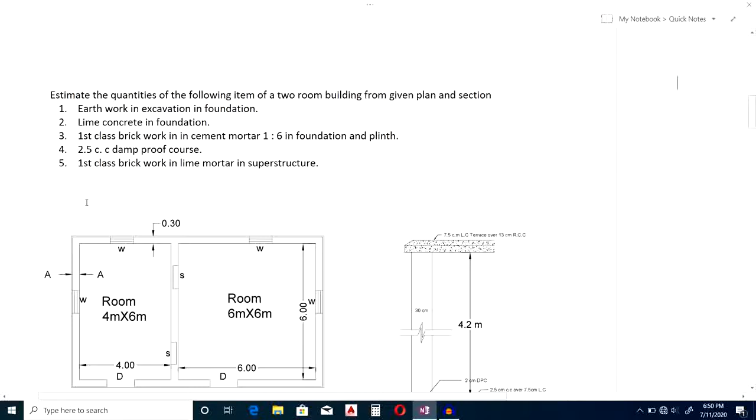Next is asking the first class brickwork in lime mortar in superstructure. First and foremost important thing is whenever you want to do estimation, you require these basic things. You must and should have three important things: one is plan, next one is section, and third one is schedule of openings. If you have these three things, then only proceed to find out the different type of quantities.

Or instead of quantities we can say estimate. You will be able to find out the different estimates. You can find out the estimate for the probable cost of that building.

So you might be thinking, what is long wall? Which one will we take as a long wall? Which one will we take as a short wall? For long wall, you have to take the wall which is lengthwise longer, and we take it out to out. One more thing about this long wall short wall method: people always say out to out, in to in. What does it mean? It means that first you have to find out the length from this center to this center, here to here, center to center.

Lengthwise this wall is long, so that's why we will consider this wall as a long wall. And similarly these walls are shorter in distance, shorter in length. These walls are short. Naturally this wall length will also be the same. So we can conclude that 2 walls are long walls and 3 are short walls, denoting them as long wall, short wall. Next, we have to find out the length for all the long walls and short walls.

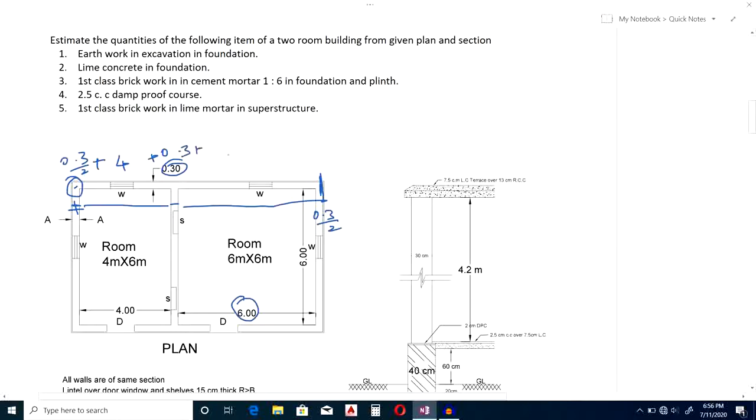We have to take 0.3 by 2 on this side, and after that 0.3 by 2 plus this length, that is 4 meter. Then we have to add 0.3, then we have to add this, that is 6 meter, as mentioned here. After that we have to add half of this length, that is 0.3 by 2. That means we take 0.3 by 2 plus 4 plus 0.3 plus 6 plus 0.3 by 2. If you add all those things and solve this, you will get 10.6.

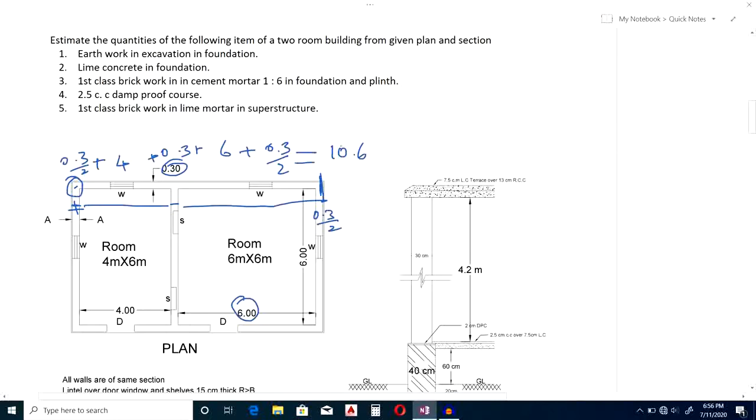Similarly, I will write this all over here. The length of long wall will be equal to 10.6 meters. We'll also see the length of short wall.

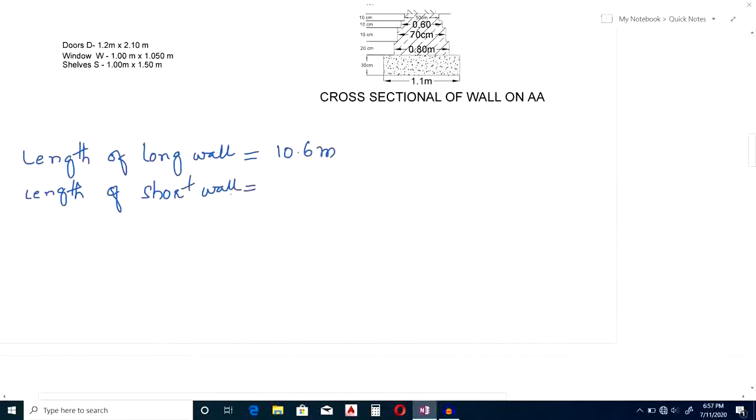Length of short wall. How to calculate the length of short wall? Similarly, how we have calculated the length of long wall, we have to calculate in the same manner. 0.3/2 plus this length is 6 meters from here to here. 6 plus this side 0.3/2.

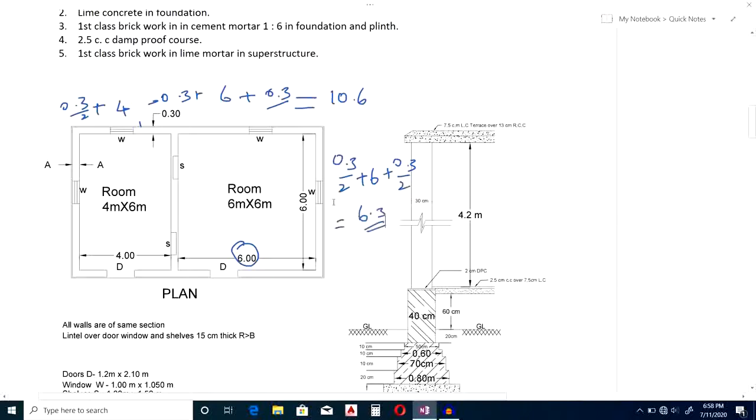0.3/2, how much will we get? 6.3 will get. So I'll write down here 6.3 meters. Now we are having the length of long wall.

Now we are having length of short wall. Our detail, we'll go for detail estimate. Next, what is asking in the question? It is asking that earthwork in excavation in foundation.

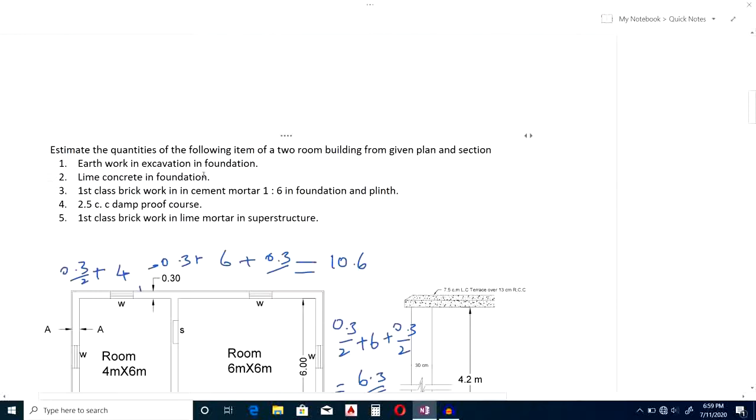Okay, first we have to go for, and remember, for doing detail estimate you have to draw one tabular column in this manner. So it should be: first item number, next particular of work, next number, length, breadth, depth or height, quantity and remark.

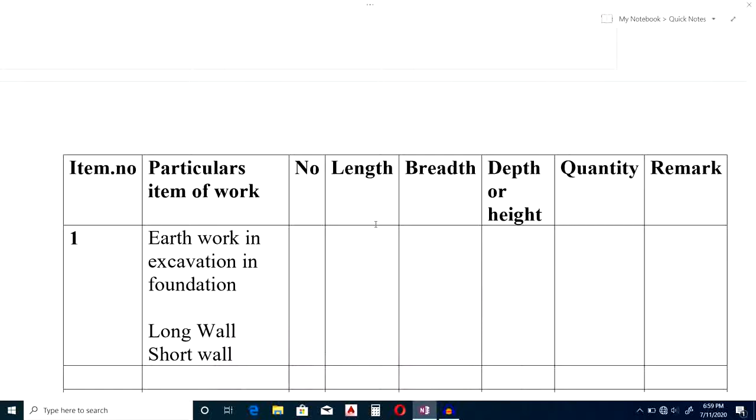Just to save time, I have made this slide, but you have to make all this with your pen and scales, whatever it may be. So now we are here as earthwork in excavation in foundation.

So we are going with the long wall short wall method, so that's why I have to write first long wall, next short wall. How many long, in the number column we have to write how many long walls are there and how many short walls are there.

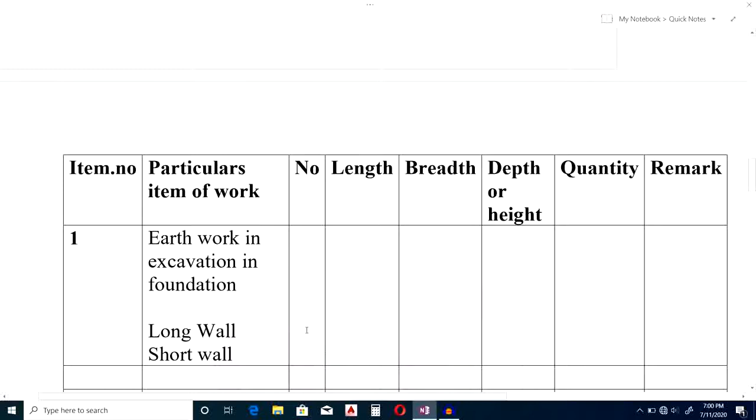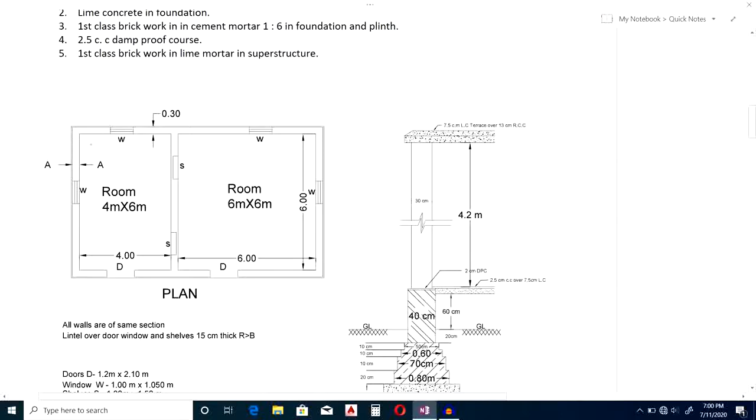If we observe in our plan, see, this is our plan. Whenever you do an estimation, the plan and section should always be in front of your eyes, so that you will easily take the values from here. After observing, we are having two long walls, because we consider this as a long wall, this also a long wall. So that's why we are having two long walls, and similarly we are having three short walls - 1, 2, 3. We'll consider these as short walls. So we'll write down here.

So long walls, how many long walls are we having? We are having 2 long walls. For short walls, how many? We are having 3 short walls.

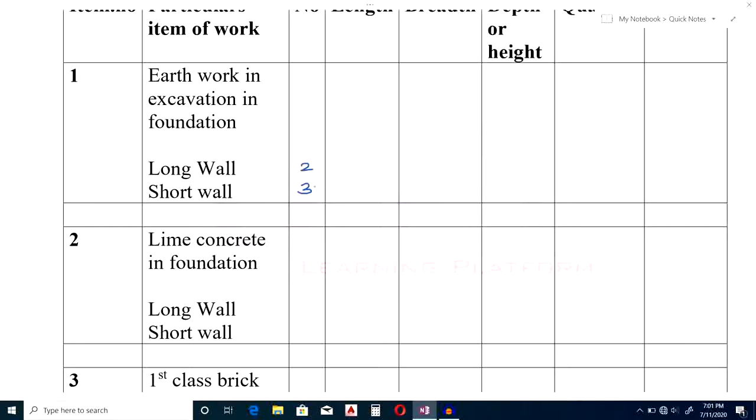Okay, next we have to write down the length. Right now we have calculated that the length of the long wall is 10.6 meters. Remember, this length is center to center length - this is the center to center length of long wall, and this is the center to center length of short wall.

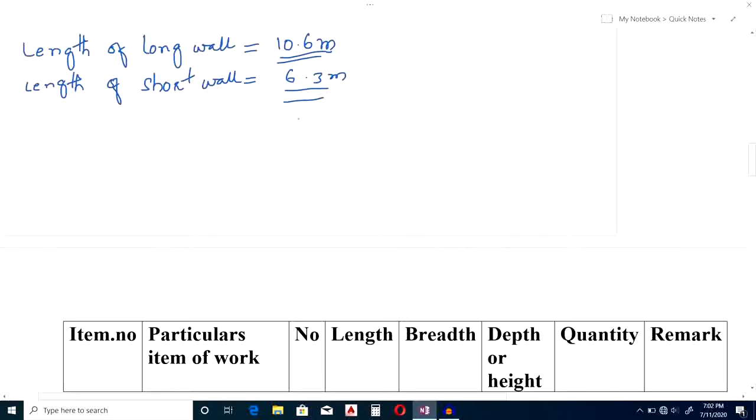See, in this method I have told you, this is not an out to out and in to in method. So in long wall, since GL represents your ground level, from your ground level you have to dig up to here. From this point to this point you have to dig this portion. This much portion you need to dug out.

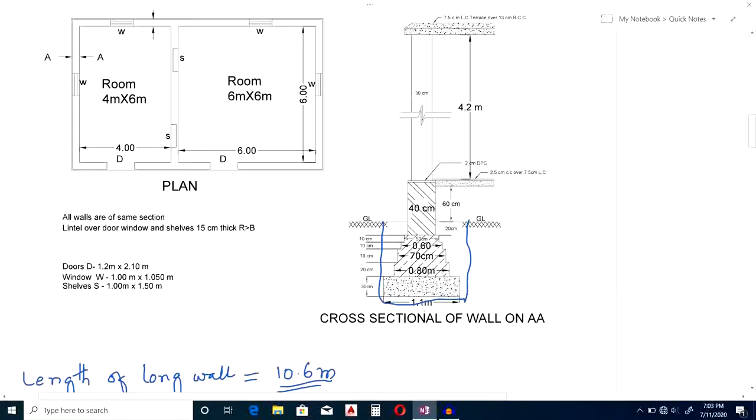So how much will be the breadth right now? Can you observe here? I'll rub this. So 1.1 meter - you have to dig 1.1 meter.

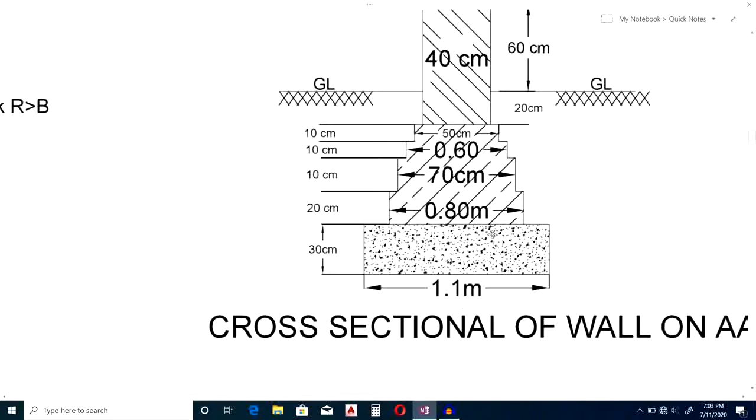How to do that? See, here you have already taken from your center to center. One minute, I'll show you - there's a main important point here. Center to center means you have taken from this center point, I will denote with the marker. This point you have taken, and you have calculated that length - that is the length, 10.6 meter.

Center means this is a section somewhere here. See, there's AA, no? Section at AA - see here, section at AA. So this means this is a section at AA. So this center means you have taken length up to here, somewhere here, at the center. So this much of length you have to add in your long wall.

Okay, on either side the same section will be there. Left side also the same section of wall will be there, and on your right side also. We have to add this length at left side also and right side also. What we have to do in the remark, we have to write - what do we have to write?

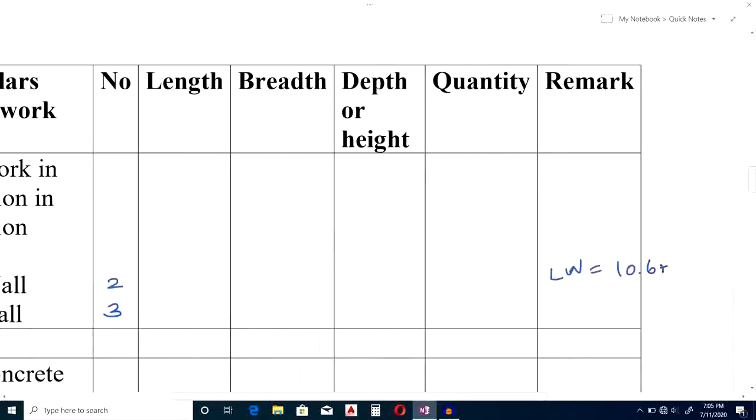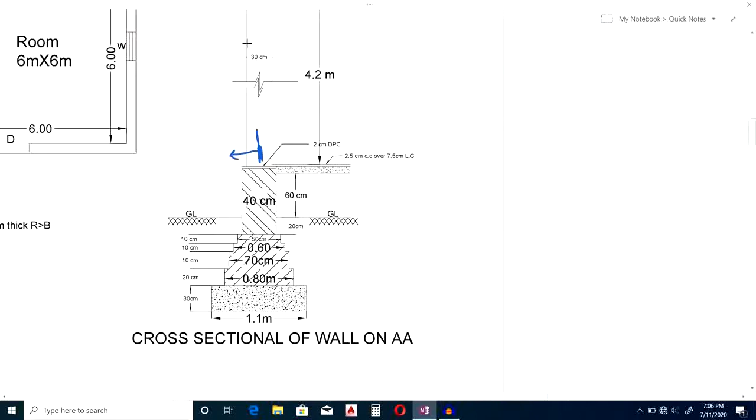Because the breadth of that whole thing you have to dug is up to 1.1 meter, you have to dug on either side, and up to this point you have taken - let me draw one line. So this portion you have already taken. Now this portion, let me highlight, so this much of portion will be there up to where the ground level is. You have to dug this much portion, you need to dug it out.

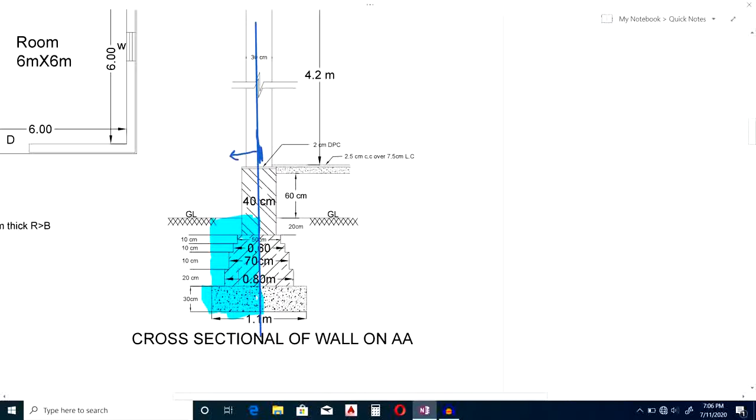Whatever I have highlighted, this much portion you need to dug out on your side to build this. Already you have taken up to this point, you have already considered. This point you have to dug it out. So on either side you have to do the same exercise - 1.1 by 2 on left side, 1.1 by 2 on right side. So how much will you get?

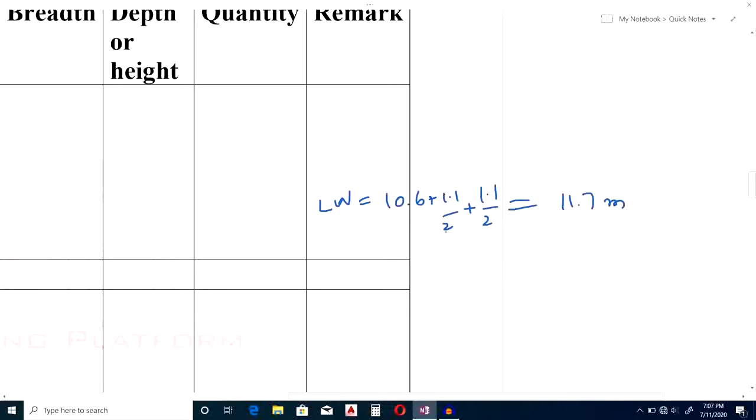11.7 meters. Just use your calculator and do this calculation, you will get 11.7 meter. So what you have to do? You have to write this 11.7 meters over here, lengthwise, in the length column, and one more thing, all the dimensions you have to keep in meter. Next, in short wall.

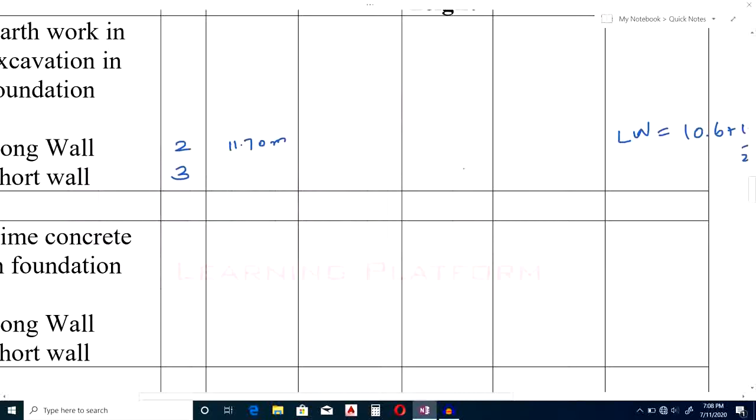See, in short wall we will consider as in to in. The center length is how much? 6 point... okay, for short wall, I'll say 6.3 meter. So for short wall you have to go for in to in. Now you have to reduce 1.1 by 2, 1.1 by 2, because it's already added in long wall. So that's why you have to subtract in the short wall.

So what you have to do? 1.1 by 2 minus 1.1 by 2. If you solve with your calculator, you will get the length of short wall as 5.2 meter. These are the most important things you have to take care of, because I have seen students do this: they will add in the short wall also, in the long wall also they will add 1.1 meter on either side, and in the short wall also they will do the same mistake. Remember, in long wall you have to add, in short wall you have to deduct. You will get 5.2, you have to write here 5.2. In short wall you have to write 5.2.

Next column represents breadth. How much is the breadth? See, here is the breadth, that is 1.1 meter. You have to write 1.1 meter, 1.1 meter, 1.1 meter. Okay, next depth.

How much depth you have to dig out for your excavation? Because you have to dig from the ground level, and since you are making a pit, you have to dig from your ground level. So up to ground level, how much distance will be there? See, from here to here it is there. That is 20 centimeter, next 10 centimeter, 10 centimeter, 10 centimeter, 20 centimeter, 30 centimeter. If you add all those things, there is 30, 50, 60, 70, 80, 90, 100. So that means 1 meter, exactly 1 meter you have to dig. In the depth you have to write down 1 meter.

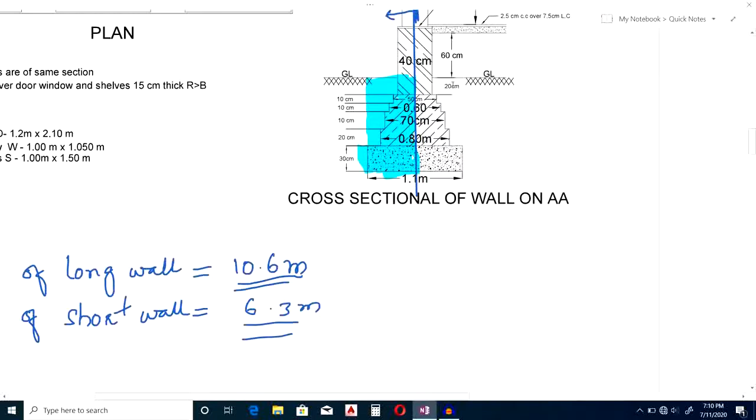That is 1.00 meter, 1.00 meter. Now what you have to do? You have to multiply all these things: multiply by 11.70, multiply by 1.1, multiply by 1. Whatever you get, you have to write in quantity here.

If you are solving this problem with me, pause this video and calculate this. Just calculate with me, so you will get the same result or not. Check it. If you do that, you will get 25.74. Similarly, if you multiply all those things, you will get quantity as 17.16. Now you have to add these two values and you will get total as 42.90. Just add with your calculator, you will get 42.90.

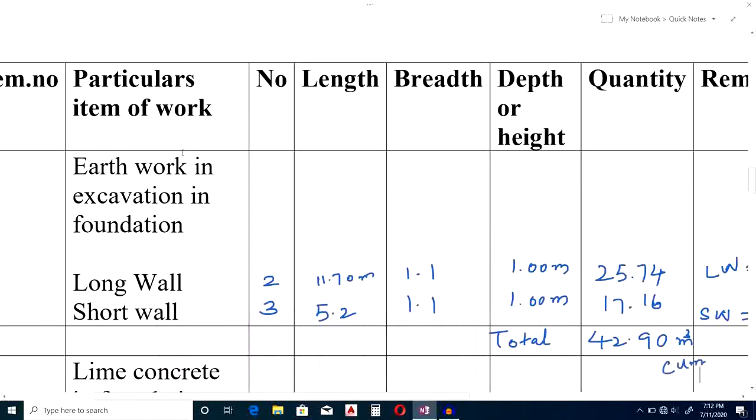Remember, one important thing is you have to write down the units. The unit is meter cube, you can write meter cube or cubic meter. What is asking in the question? You have to find out what you have calculated - this one, earthwork in excavation, is over. So right now you have calculated earthwork in excavation.

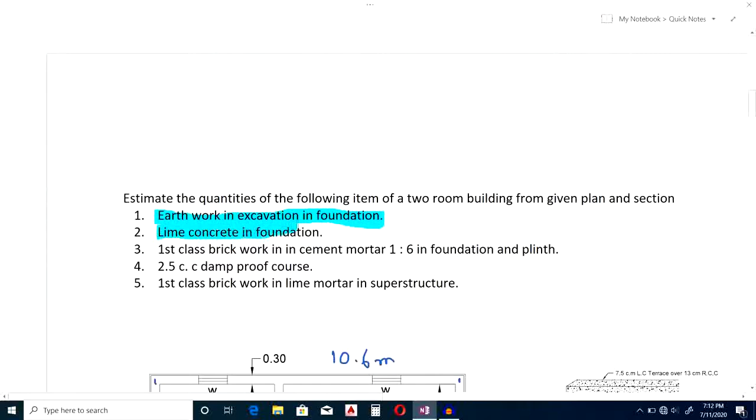Next thing you have to find out is lime concrete in foundation. Where is the lime concrete in foundation placed? See, this is the lime concrete in foundation, only up to this one. So you have to find out this length, you have to calculate this. This is lime concrete, we also call it PCC.

Similarly, you are having 2 long walls, 3 short walls, and for the length, you have to do the same exercise. That is 1.1 is the breadth, 2 plus... why am I writing 1.1 by 2? Because this is the breadth there, now 1.1 meter, that's why 1.1 meter by 2, plus. Next, what thing do you have to write for long wall? How much is the length?

10.6 meter plus 1.1 by 2, because 1.1 by 2 will be on left side, 1.1 by 2 will be on right side. If you do this, you will get the same result, that is 11.7 meter. Similarly, for short wall, you have to reduce 1.1 on either side: minus 1.1 by 2, minus 1.1 by 2. So you will get the same result, 5.2 meter.

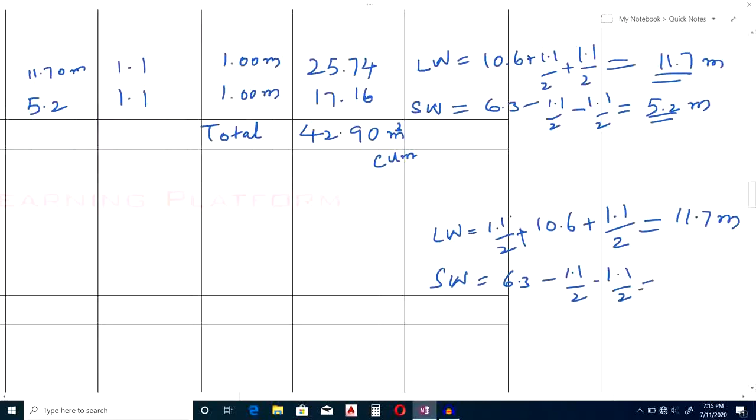Next is breadth. Breadth is also same, that is 1.1. Breadth of the PCC also will be the same.

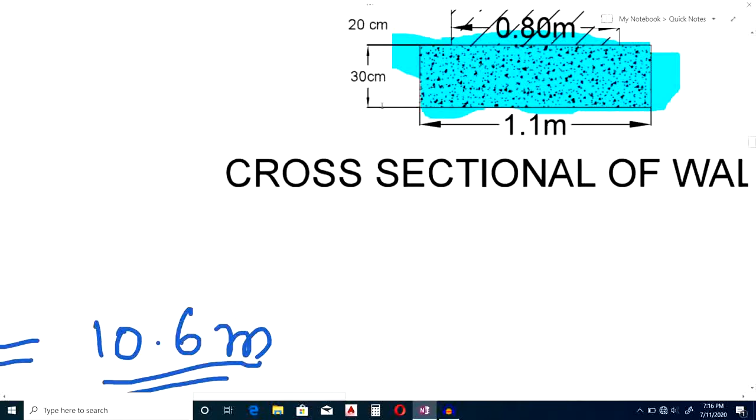Next depth. Depth is very important. The depth is only 30 centimeter, here it is, or shall I zoom in? This is 30 centimeter. So 30 centimeter, if you convert to meter, becomes 0.3 meter. Here you have to write 0.3. If you multiply all those things, you will get 7.2, and here you will get 5.15.

This is meter cube, and this is also cubic meter. So next, you have to add those things. Here you have to write down a total. If you add those things, you will get 12.87 meter cube.

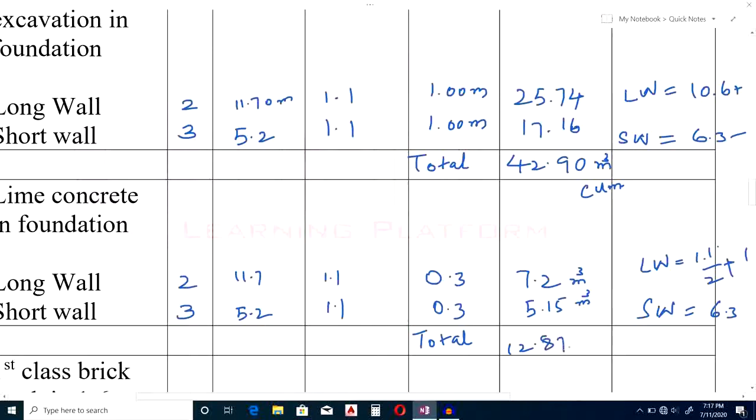Next we'll calculate the next question: first class brickwork in cement mortar 1:6, foundation and plinth. We have to find out this, but your foundation is in stepwise, it's a step foundation. So we have to calculate long wall, short wall in the stepwise.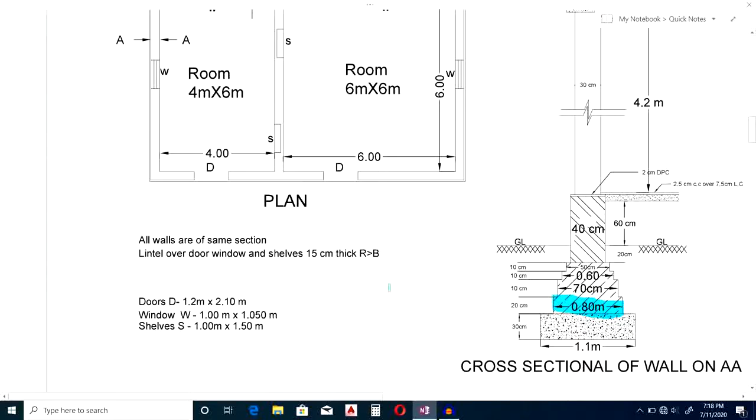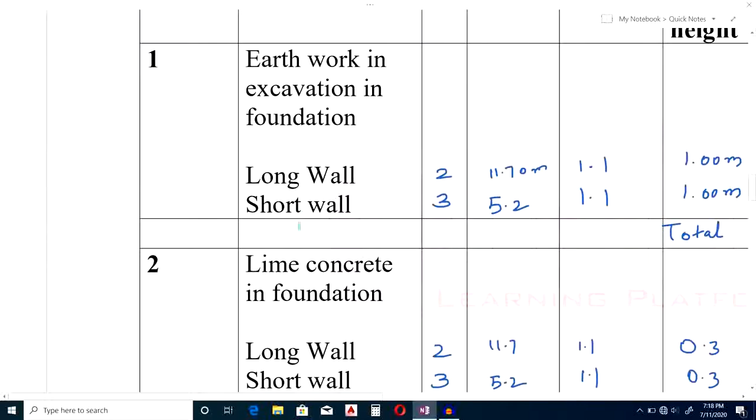Remember, this item is first class brickwork in cement mortar 1:6 in foundation and plinth. This should be written in the particulars column. Here, first class brickwork 1:6 cement mortar in foundation and plinth, that has to be mentioned in this column. There is a particular item of work. Now you have to mention all whatever things are there, detail specific, and provide in your estimate.

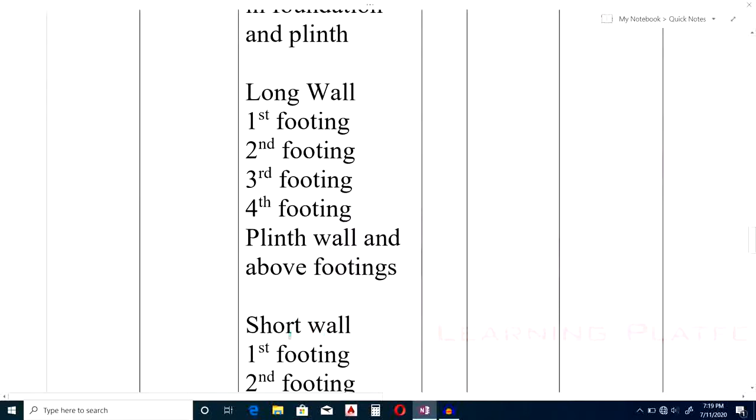That first we'll calculate for the long walls. Next we'll go for short wall. These things you have to write in this section. First you have to write down here for long wall, first footing.

We'll go for the first footing. So long wall, how many long walls are we having? We are having only 2 long walls, so I'll write down 2 here. That's why the number I'm writing is 2.

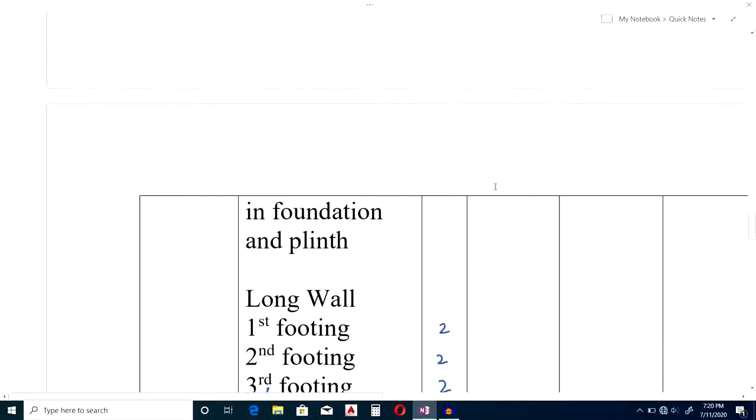Next is length. How to calculate the length? We know that our length of long wall is in the remark. You have to do that calculation lengthwise for the first step. So long wall is how much? We are having dimension of 10.6 meter plus.

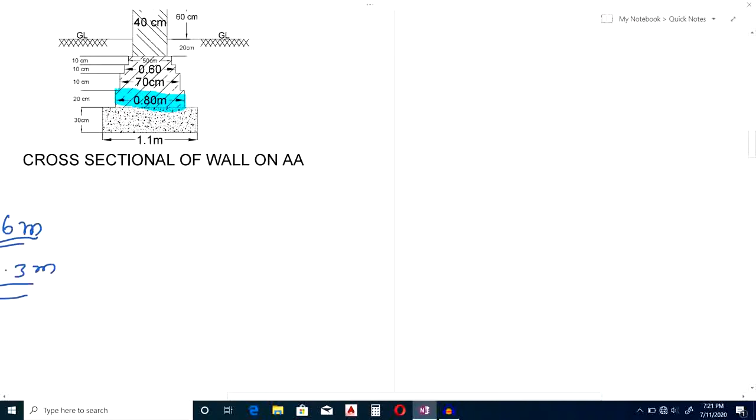Remember here, go to your sectional plan. So length is, breadth is how much? 0.8 meter. These 0.8 by 2 you have to add twice on your length of long wall. 11.4, you will get 11.4 meter. Breadth is how much? It is 0.8.

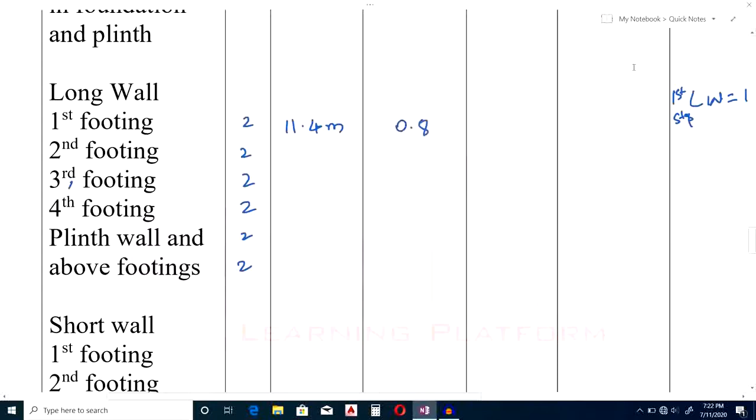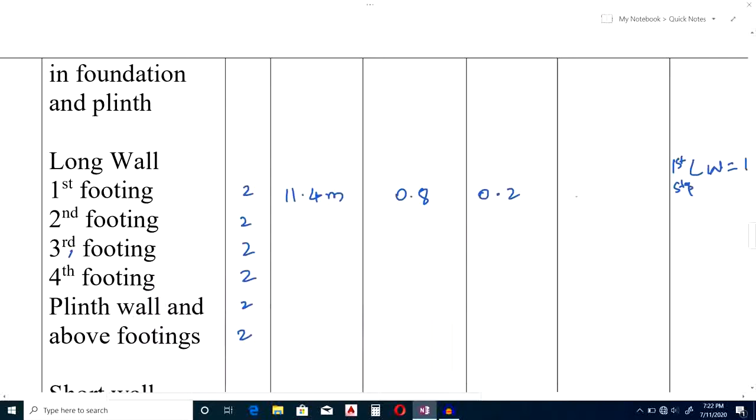And depth is how much? So for depth, 0.8 meter... depth is 20 centimeter, that is 0.2. If you multiply all these things, 11.4, 0.8, 0.2, you will get the quantity of your first footing, that is 3.65. Next, similarly for your second footing, we have to do the same calculation.

So second footing, I'll write here, is equal to 10.6 meter plus, we have to go to sectional drawing, that is the correct word, sectional drawing, not sectional plan. So it is 70 centimeter and depth is 10 centimeter: 0.7 by 2 plus 0.7 by 2. If you solve this, you will get 11.30.

We'll calculate all the steps. For third step, we'll repeat the same, that is 10.6 plus 0.6 by 2 plus 0.6 by 2, you will get 11.2. 10.6 plus 0.5 by 2 plus 0.5 by 2, you will get these values, where you have to submit all this value.

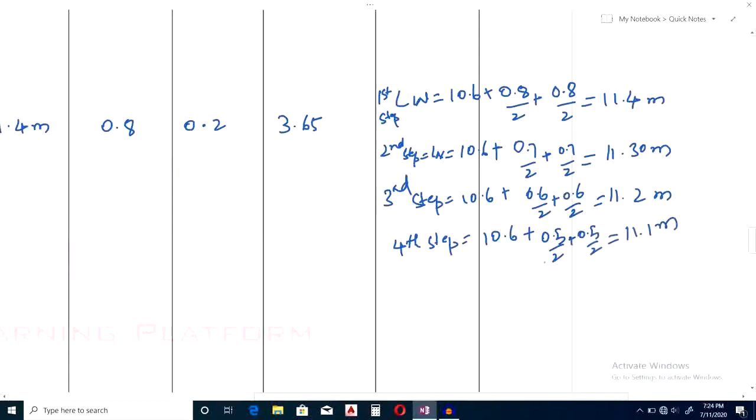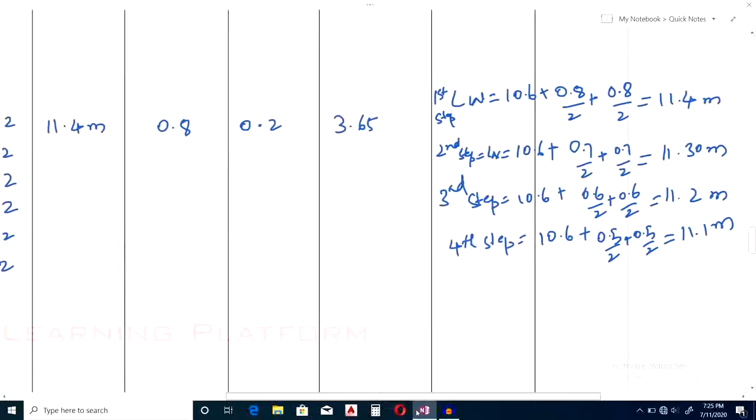You have to substitute here. First is 11.4, you have substituted. Next is 11.3, or shall I zoom it out? It should be done zooming out. Here you have to write down 11.30, 11.20, 11.10. These all are in meters.

Remember, the units are very important. Next is 0.7, this is 0.6, this is 0.5, and all are 0.1 depth. If you multiply these two, 11.30, 0.7 and 0.1, you will get 1.58. Similarly, you will obtain by multiplying all those things 1.34, 1.11.

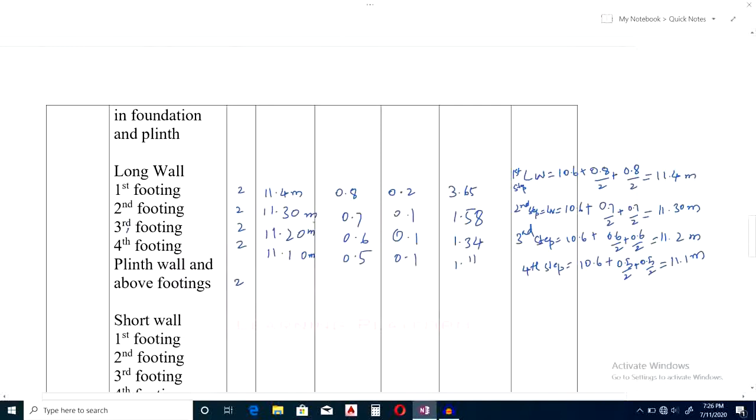Now, next important: plinth wall and above the footing. Now we'll go for the sectional plan. How much will be the plinth wall? Say up to 50 centimeters we have calculated.

Now I want the quantities of this plinth wall and above. See, the breadth is 40 centimeter and overall depth here 20 centimeter and 60 centimeter, that is 80 centimeter. 80 centimeter means 0.8. Depth will be 0.8 and breadth will be 0.4.

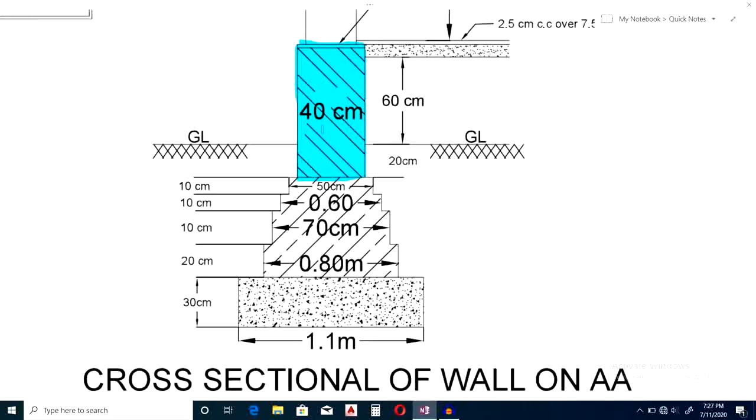So I will calculate for plinth wall and above. The length will be 10.6 plus 0.4 by 2 plus 0.4 by 2, that will be exactly 11 meter. So that 11 I have to write here, 11 meters into 0.4 into 0.8. If you multiply all those things, you will get 7.04. Now your job is still not done.

Same thing you have to repeat for your short wall. 6.3 is your length of your short wall. Minus, you have to reduce 0.8 by 2, as you have done in your foundation. So how much you will get? 5.50, first length.

Similarly for next, 0.7 by 2 minus 0.7 by 2, you will get 5.4, 5.6. Similarly third, that will be 6.3 minus 0.6 by 2 minus 0.6 by 2, same, 6.3 minus 0.5 by 2 minus 0.5 by 2, you will get 5.8 meter. You have to calculate this with your calculator, you will get the same values.

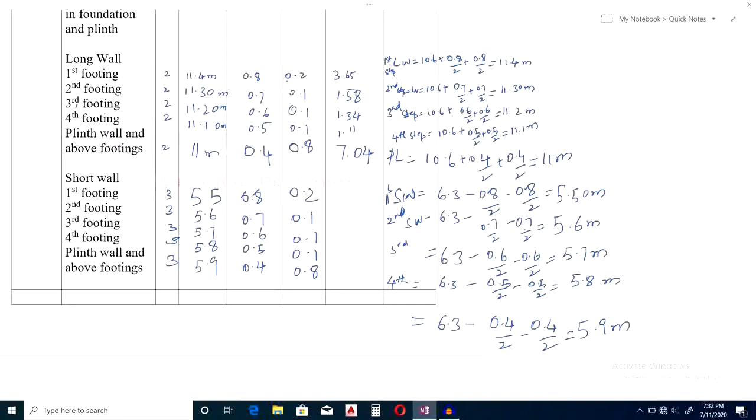Have you got this point, from where we are getting these values? See, for this, estimation is quite easy. First thing, the student must be able to read the drawings. If you are able to read the drawings, then the rest of the thing is very easy for you. Okay, so you have done all those things.

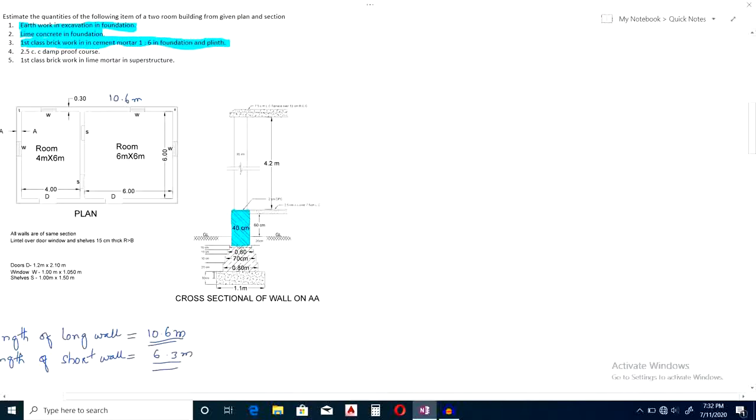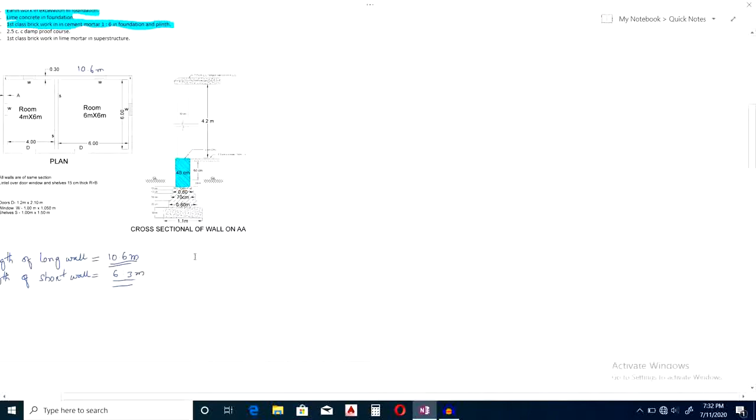From here, from your sectional plan, we have taken all those values: 0.6 meter, 70 centimeter depth, we have taken and substituted in the tabular column, solving with a tabular column, and we are getting the result. Now we have to multiply 3, 5.5, 0.8 and 0.2, you will get 2.64. Next, if you multiply 3, 5.6, 0.7 and 0.1, you will get 1.18.

And similarly, if you multiply all those things, you will get 1.03. And if you multiply 3, 5.8, 0.5, 0.1, you will get 0.87. And the last one, you will get 5.66. You need to multiply 3, 5.9, 0.4, 0.8.

If you want, if you ask me to do it, I have one calculator, I will do it for you for this last one. That is 3 into 5.9 into 0.4 into 0.8, which gives 5.66. Same thing you have to write down.

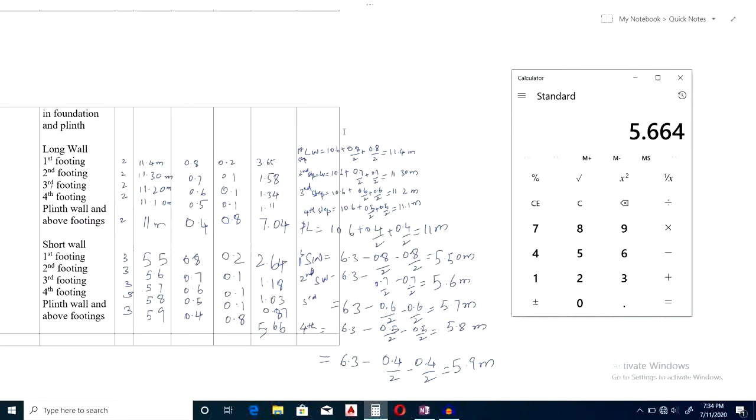Now, next you have to add all those things: 3.65, 1.58, 1.34, 1.11, 7.04, 2.64, 1.18, 1.03, 0.87, 5.66. If you add all those things, you will get 26.10 meter cube or cubic meter.

Now you have completed this part also. Now fourth point is you have to calculate 2.5 cc damp proof course. For DPC you won't get the quantity in the form of meter cube, you will get it in the form of meter square. Okay, we'll solve this.

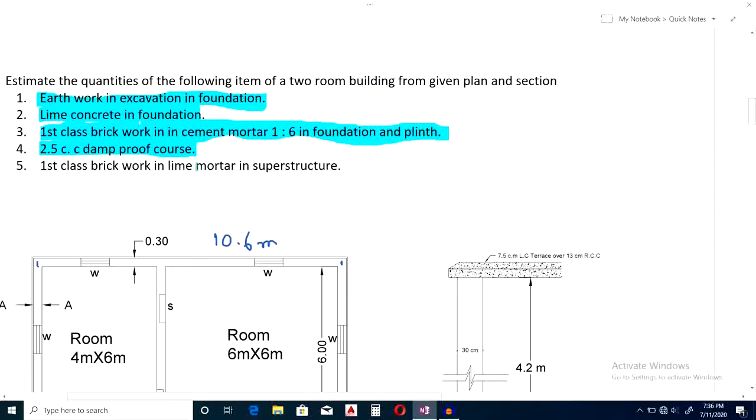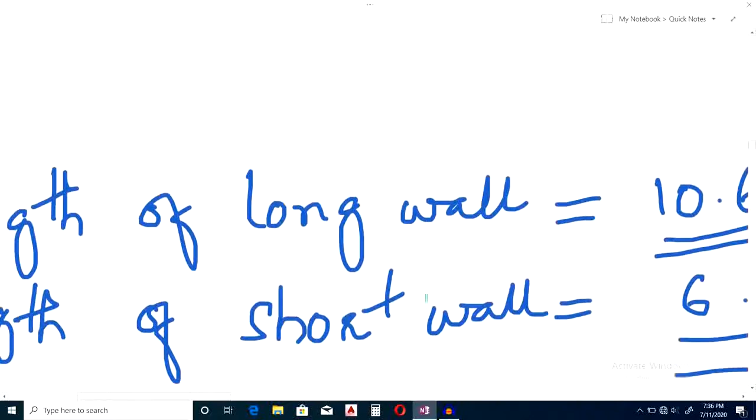Okay, so where is DPC? So DPC will lie over here. Can you observe here, a small portion between these two lines? We call it 2 centimeter DPC, is there, no? It is here, that is a DPC, and the main function of this DPC is it prevents water from entering from your ground level to your superstructure. Okay, that's the main thing of your DPC.

If you won't provide that DPC, what will happen? There are more probable chances of capillary action taking place. Okay, if the capillary action occurs in the building, what will happen? The water, whatever is there at the ground level, if suppose the ground level is very up and you have not provided DPC, what will it do?

The water will, capillary action will take place and the water will come up to here, and sometimes this wall will become wet, and the wet wall is not good. Okay, so it will be weak, your wall.

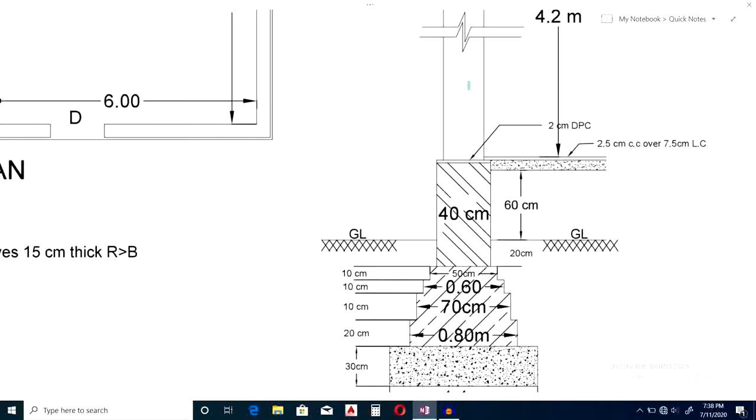So that is the function of DPC. It prevents the water to go to your building or superstructure. Okay, capillary action, basically it avoids the capillary action of your water.

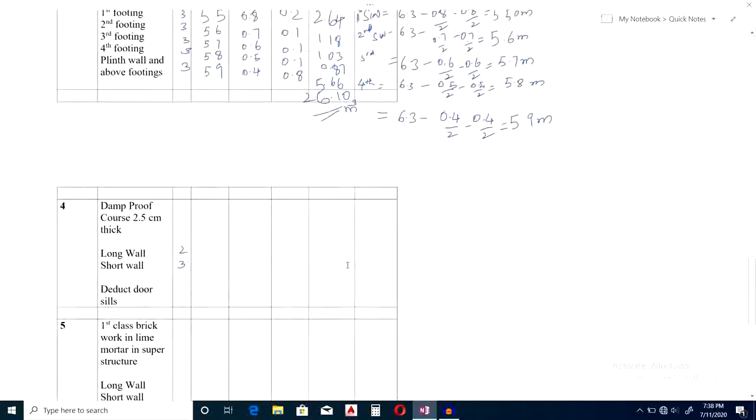Similarly, long wall. How many long walls are there? We know we have 2 long walls and 3 short walls. For length, again you have to calculate. How to calculate for long wall? Long wall will be center to center length of long wall, that is 10.6 plus breadth will be the last footing breadth.

Just observe here, the breadth will be this much only, 40 centimeter. Okay, the breadth will be 40 centimeter. 40 centimeter means 0.4 meter. 0.4 by 2 plus 0.4 by 2. If you add all those things, how much length you will get? You will get 11 meter.

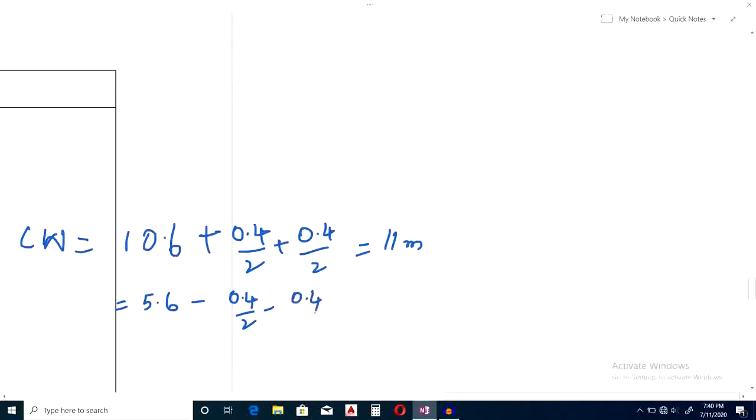Similarly for short wall, 6.3 minus 0.4 by 2 minus 0.4 by 2. How much you will get? You will get 5.9 meters. Okay, you have to write all those things over here. The long wall is 11 meter and it is 5.9 meter. Breadth is 0.4

and depth you will not consider in DPC. Okay, so we'll keep this as blank. Now we have to multiply these three things, 2, 11 and 0.4. By multiplying this you will get 8.8, and this short wall you will get 7.08. Okay, if you do a total you will get 15.88.

Just guess the unit for this DPC. I just pause the video and just write the unit for DPC in your comment. Okay, next I will tell you the unit for DPC will be meter square.

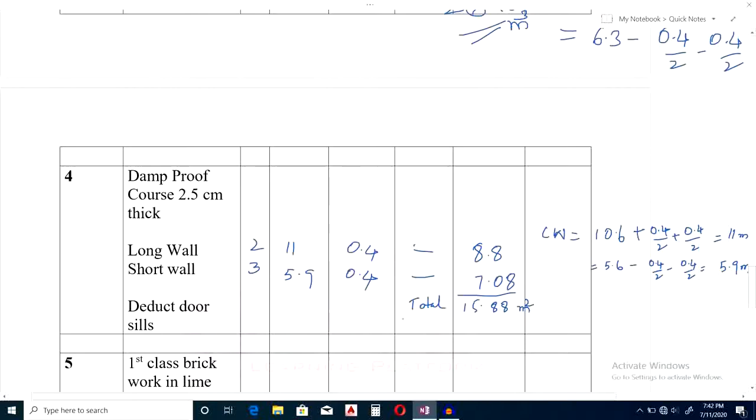Okay, now we have to deduct for door sills. Okay, how many doors are there? 2 doors are there, I will show you in plan. Okay, these 2 doors are there. Now we have to deduct that DPC.

We don't provide DPC over here because the sill will come on this place now. That's why we won't provide DPC on this point. Okay, so you have to deduct this. So 2 doors are there, and you have to minus this breadth.

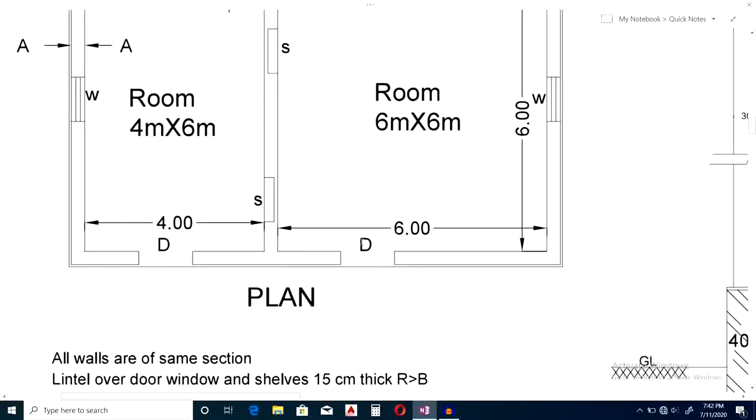So where you will get the dimension for this door? The schedule of openings. Doors is there, now 1.2 meter and 2.1 meter. So height of that door is 2.1 meter and breadth is 1.2 meter. Okay, anyhow in DPC we are not considering the depth.

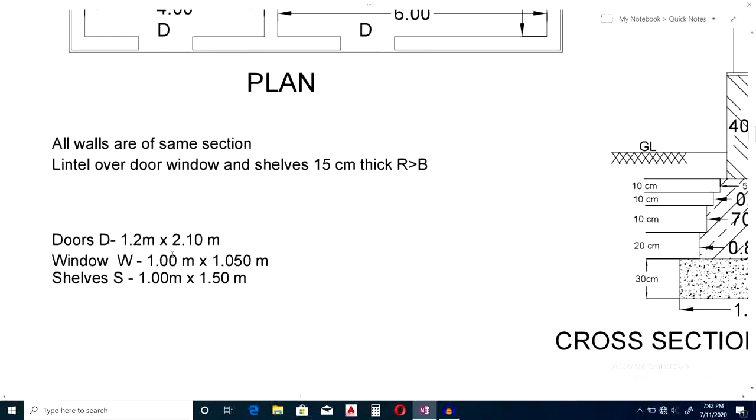Okay, so we will consider this 1.2 meter. In the length we will consider 1.2 meter into how much breadth you will consider over here? We will consider 0.4 only. Depth you won't bother about that. If you multiply these things you will get 0.96.

You have to minus 15.88, that is the total value. You have to reduce this 0.96. If you do that you will get total as 14.92.

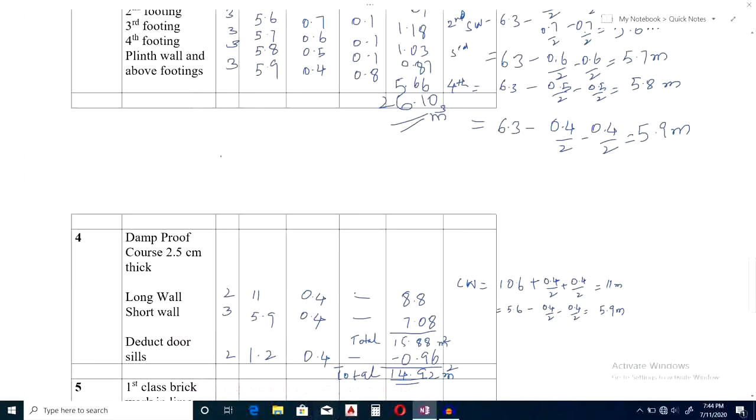Okay, now we'll move to first class brickwork in lime mortar. That's I think the last point. Last thing I'll ask in the question is first class brickwork in lime mortar in superstructure. If you do this, then your first problem will get complete. Okay, so how to calculate first class brickwork in lime mortar?

See, you have to go to sectional plan again. So whatever this will be there now, from here to here, this entire area is your brickwork. This thing should be considered. Okay, so depth is 4.2 meter and breadth is 30 centimeter.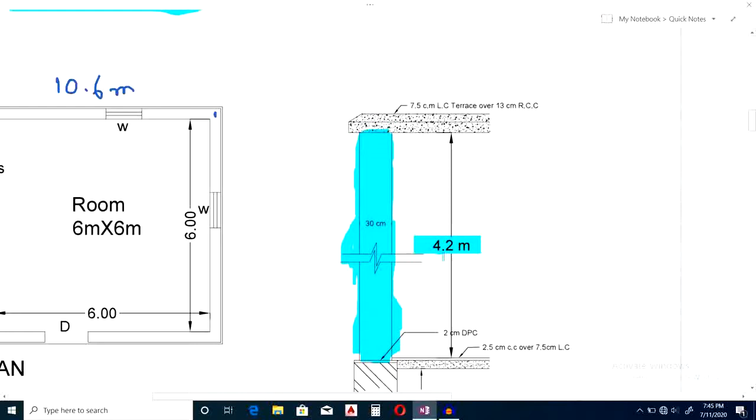Okay, see, for this you need not reduce all those things. Okay, the length you have already calculated. Breadth is 30 centimeter and depth is 4.2 meter. Now we'll go for long wall. How will be the length of long wall?

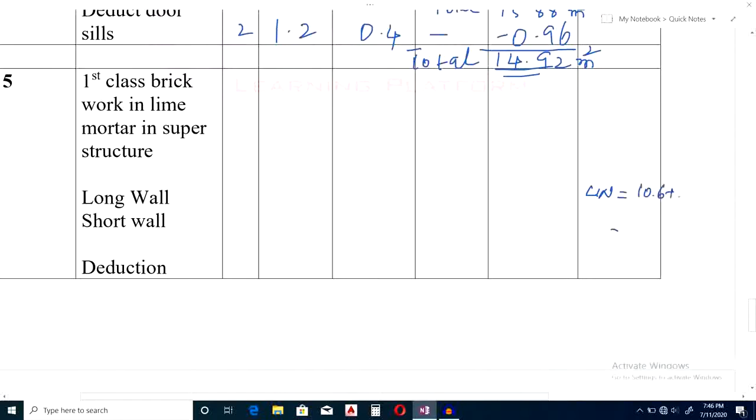So before going, right here, we'll calculate the length of long wall. How much is the length of long wall? The center to center length of long wall is 10.6 meter plus 0.3 by 2 on either side. If you add this thing, you will get 10.9. Okay, similarly for short wall, how much will be the length?

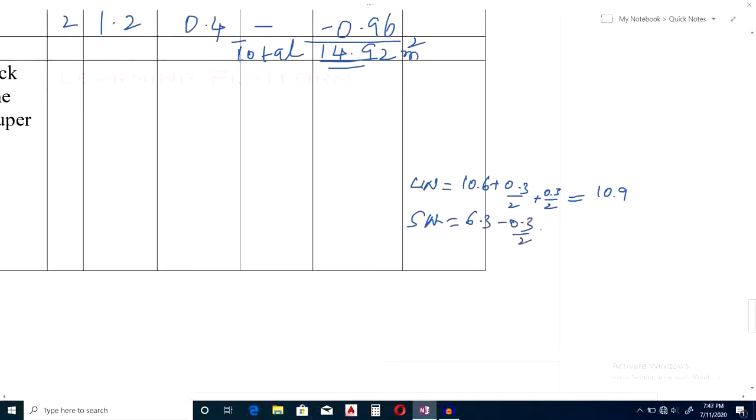Length will be 6.3 minus 0.3 by 2 minus 0.3 by 2. If you do that, how much you will get? You will get exactly 6 meter.

Now we'll hear, how many long walls are there? 2 long walls, 3 short walls. So length of long wall is 10.9 meters and short wall is 6 meter. Breadth is 0.3, for depth is 4.2.

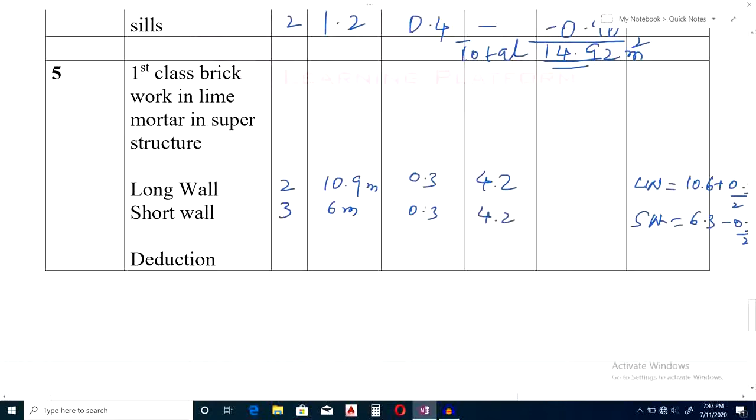If you multiply, depth is 4.2. If you multiply all those things, you will get 27.47, and similarly here you will get 22.68. If you add those two figures, you will get 50.15. That will be meter cube.

Now we'll go for deduction.

Why will we go for deduction? Because we considered the whole wall length. In the wall length, you have also provided doors, windows, and other openings that need to be deducted. How do you deduct all those things? First, you consider it as a whole, then you deduct for the number of doors, windows, whatever is there.

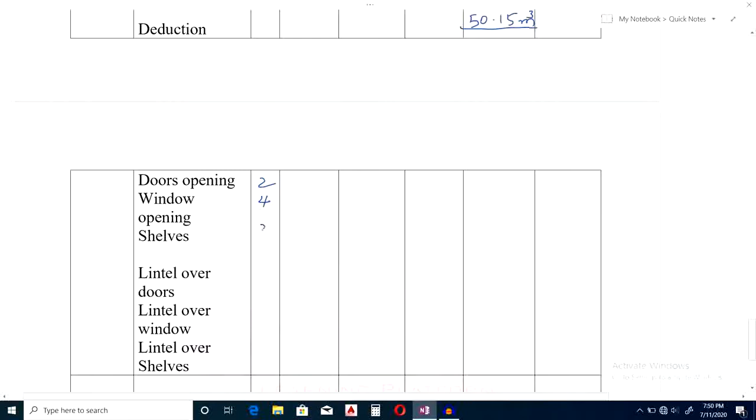So, door openings - how many door openings are there? 2 doors. And windows, we are having 4 windows as you observe in the plan, and 2 shelves. Just observe in the plan - we have 2 doors, 4 windows, and 2 shelves. This many things we have mentioned.

But how to get this dimension? Door having dimension 1.2 breadth and depth will be 2.1, and window will have 1 meter breadth and 1.5 meter - sorry, it's written as 1.05, actually it's 1.5 meter. Similarly, shelf will be 1 meter and 1.5 meter depth.

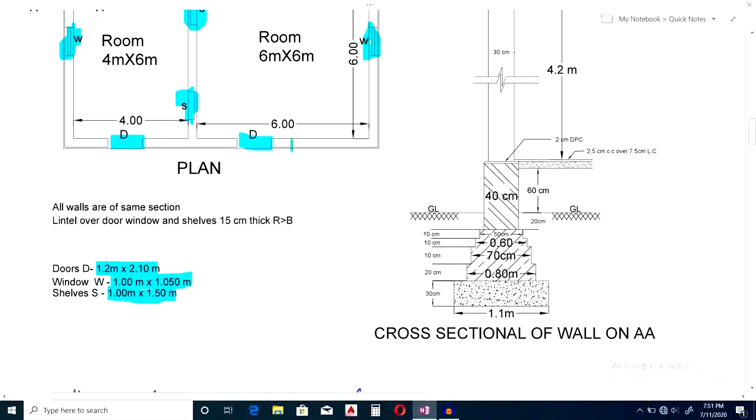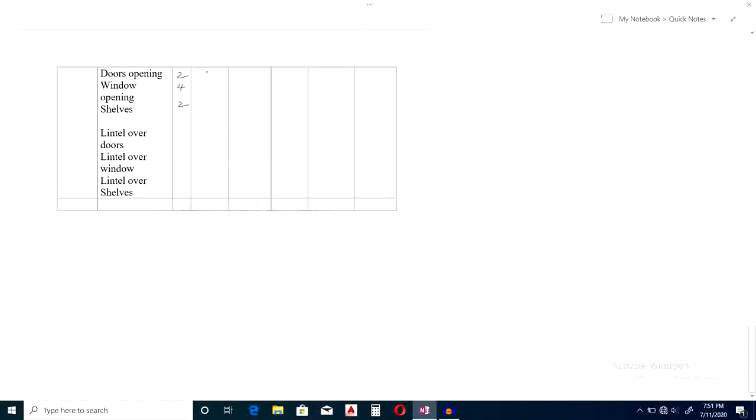So these you have to mention. And for breadth, how much breadth? The wall thickness you have to reduce. Wall thickness is 0.2, and same I will write down - for doors is 1.2 and 0.3 is the thickness of wall we have to take here, 2.1 is the depth, and next is...

Now if you multiply this, the values you get are 2, 1.2, 0.3, and 2.1. If you multiply that, you will get 1.51 here. Next you will get 1.8, next you will get 0.6.

Similarly, you have to reduce for lintels, because lintel will be there on all the openings. How to reduce that? Similarly you write down how many doors are there - 2 doors, 4 windows, 2 shelves.

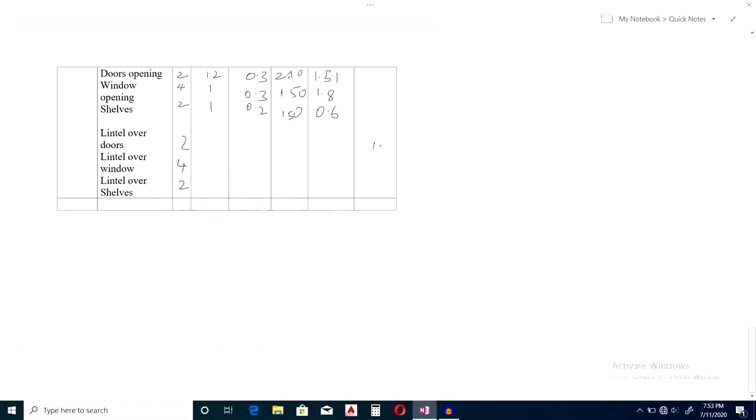For length, 15 centimeter bearing will be there on either side, so that means 30 centimeter you need to add on your length. So 1.2 plus 0.15 plus 0.15 - how much will it be? It will become 1.5. Similarly for this, 1 plus 0.15 plus 0.15, it will become 1.3. For window, shelf and all those things, you'll get 1.5, 1.3, 1.3.

And the breadth will be the same as your wall, that is 0.3, 0.3, 0.3. Next, what will be there? Next is depth - it will provide for 15 centimeter, that is 0.15, 0.15, 0.15.

You have to multiply these three things, you will get the value. For the first value, you will get 0.14. Next value, you will get 0.23. Last value, you will get 0.12.

If you add all those things, you will get the total deducted value. Total deduction will be how much? If you add only these things, that will become 4.40.

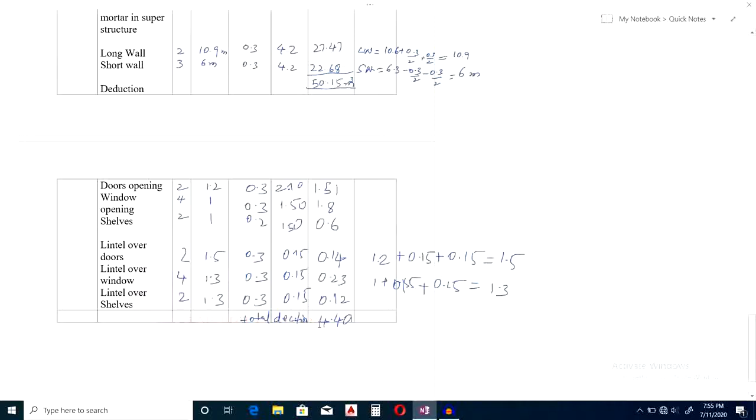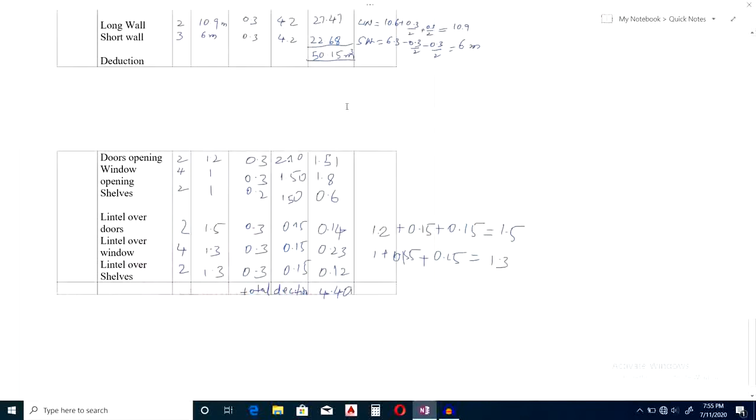For grand total, what do you have? This total 50.15 is the total wall length. This much is the total deduction. Now you have to reduce 50 - you take out 4.4 from 50.15 meter cube. By doing so, you will get a grand total, or net total, net volume equal to 45.75 meter cube or cubic.

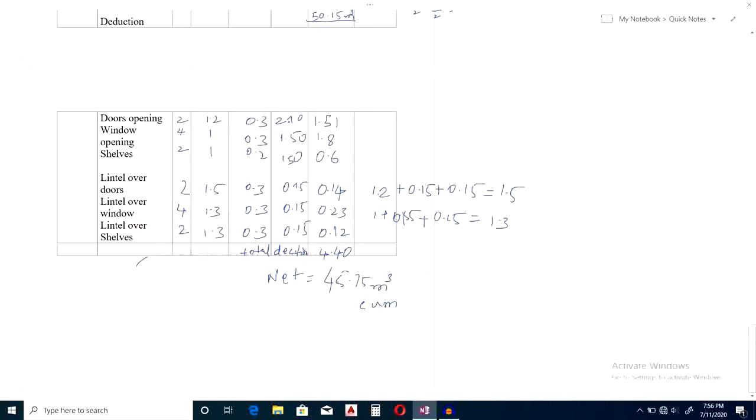Whatever the question asked, you have calculated all those things. So I'll write down here, just for you I'll do this over here. Total earthwork excavation total value, how much you have obtained? That is 42.90 meter cube.

Similarly, this - how much you have obtained? That is lime concrete 12.87. And this much, how much you have obtained? That is total length you get 26.10. And this, how much you have obtained? That is DPC 14.92.

That will be meter square. Units are most important - you have to write down meter cube, this also meter cube, and this will be last, first class brickwork - how much will be there? 45 point... Okay guys, that's it for you.